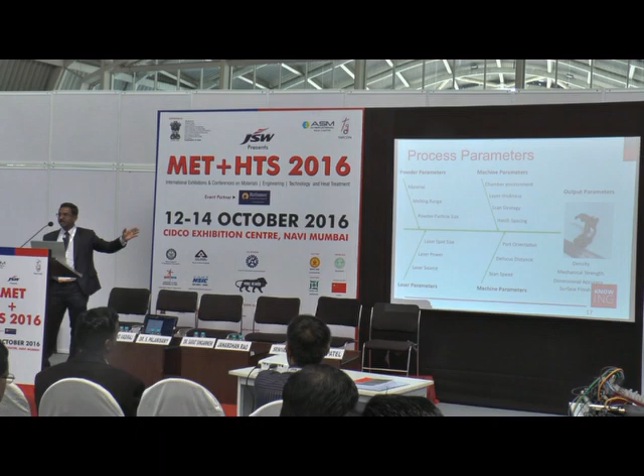As I mentioned earlier, the process parameters are key, critical things. There are a number of parameters—I've got only a few of the critical ones here: powder-based, laser-based, and machine-based parameters, with quite a number of machine parameters. To get the output, obviously you're looking at high density and mechanical strength, dimensional accuracy, and good surface finish. Those are the critical areas.

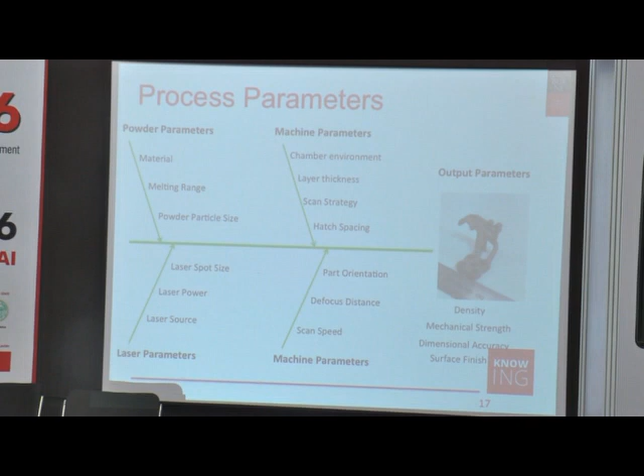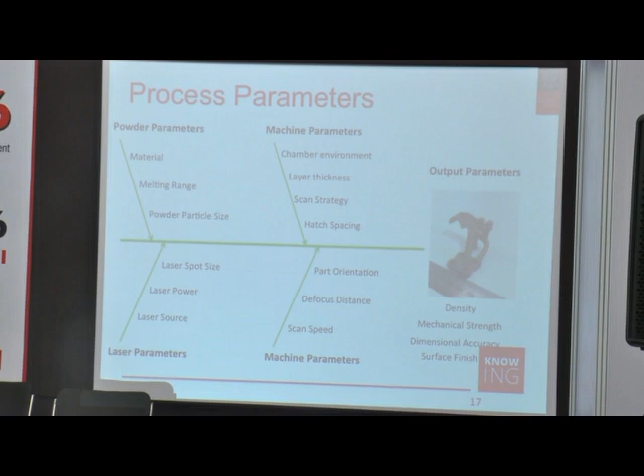The physical phenomena involved in the selective laser melting process are rapid thermal input, high solidification rate, and phase transformations. Of all the parameters, laser power and scan speed directly influence the microstructures, but in this presentation I'll focus on only a few: powder particle size, scan strategy, defocus distance, part orientation, and scan speed.

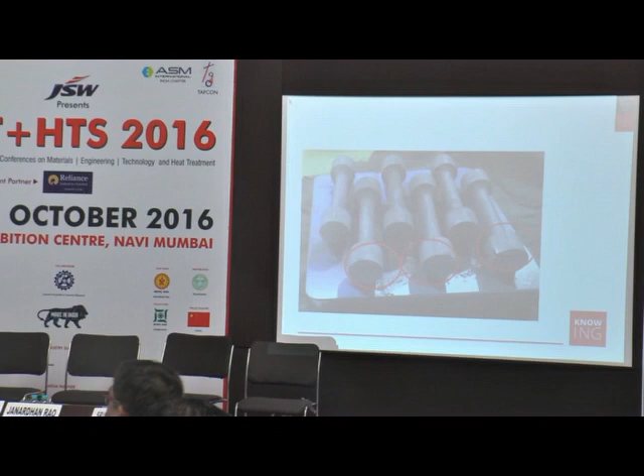Just to show you an example of what we faced when we recycled the powder - in this case, tensile samples we prepared opened up, because the powder particle size was different. You can see it there, here, and also here. The surface couldn't close properly because even though we started building it, we didn't stop - we should have stopped there but kept building the part. When the stage goes down and the powder particle size is not uniform, you get issues like this.

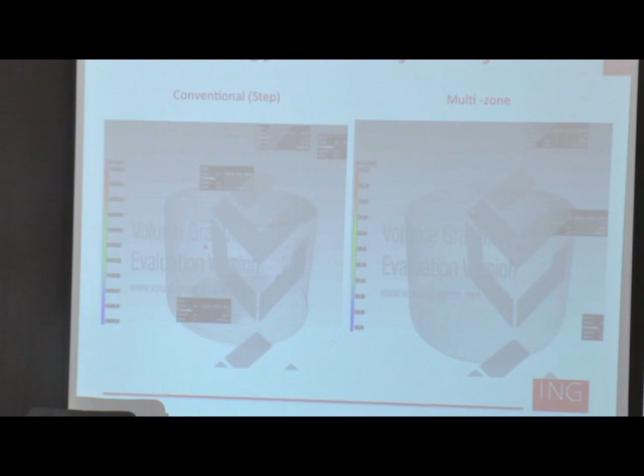Next is the scan strategy. Unfortunately, I cannot show the exact strategy we used, but I can talk about it briefly. In this case, you're looking at a CT scan image. Conventional step-by-step scan can be done, like a raster scan: go in a line, step up, another line, step up, another line.

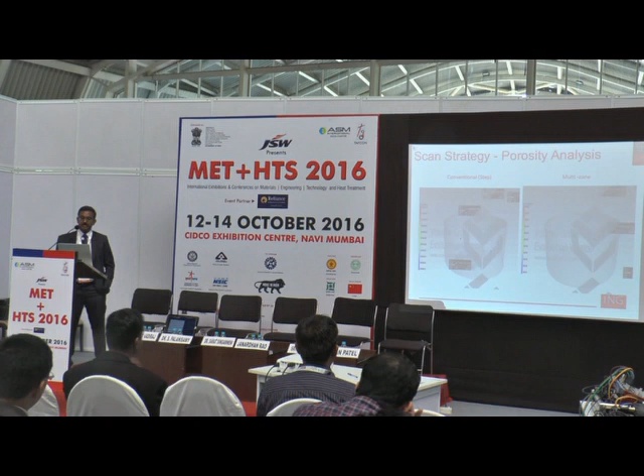Compare the conventional strategy with the multi-zone strategy which we used. There's a porosity visible in the CT scan image here. Compared to the multi-zone approach, we didn't get any porosity. So scan strategy also plays an important role.

How do you scan the laser when you melt the powder particle within a part? When you look at the top surface of the same sample in the same image, look closely here. In this particular section, the end section of the sample, you can see porosities after each scan, layer by layer.

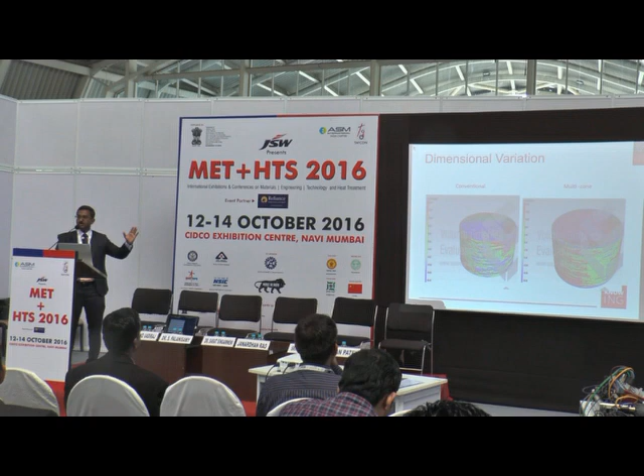It's not properly melted, the powder particle is not properly melted. When you compare to multi-zone here, the end section, you don't see any porosities in this case. So you have to optimize the scan strategy for the powder particle type and the component you want to manufacture. This is a CT scan with dimensional variation, which shows the multi-zone part looks far better than the conventional scan type.

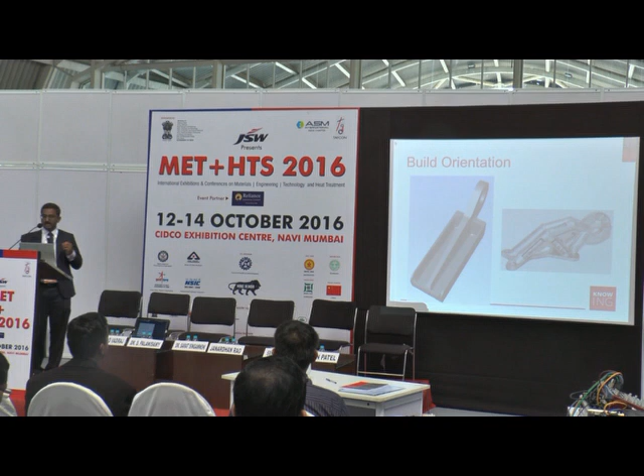However, the challenge is with regard to the inclined, horizontal, or vertical columns - what is the variation, what property variations are there? That is a bit interesting to look at from the research point of view.

Particularly in that case, quite a number of studies have been done by researchers around the world, focusing on different properties for horizontal, vertical and inclined builds. As you can see, compared to the wrought sample, which is the end data, the horizontal, vertical and 45-degree builds have completely different parameters.

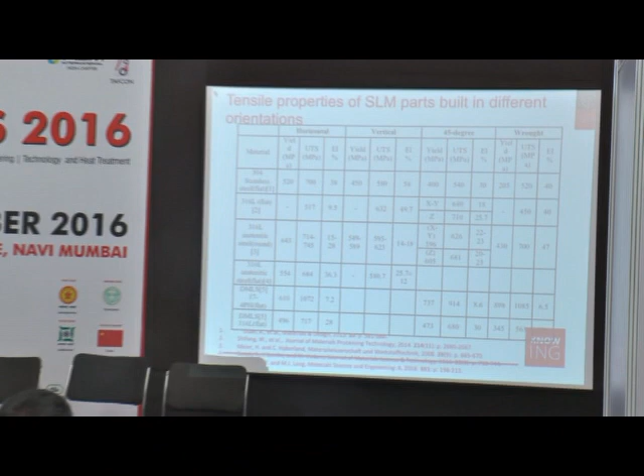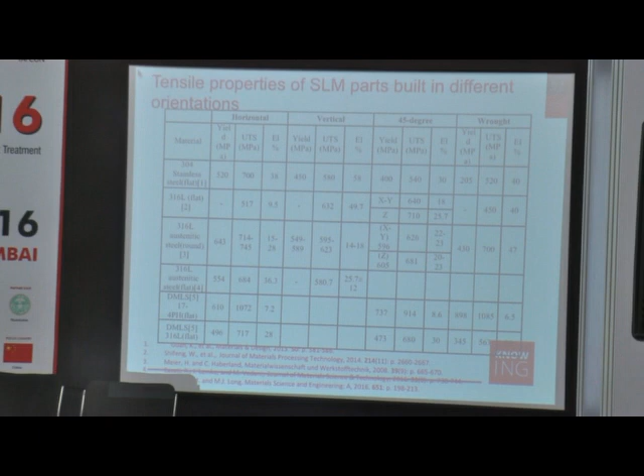Having consistently obtained this kind of information is very important to know which is the best property based on your product and what you want to use. Whether you want to build it horizontally or vertically, it all depends on the end product, where it's going to be used and applied. Again, another example from the literature.

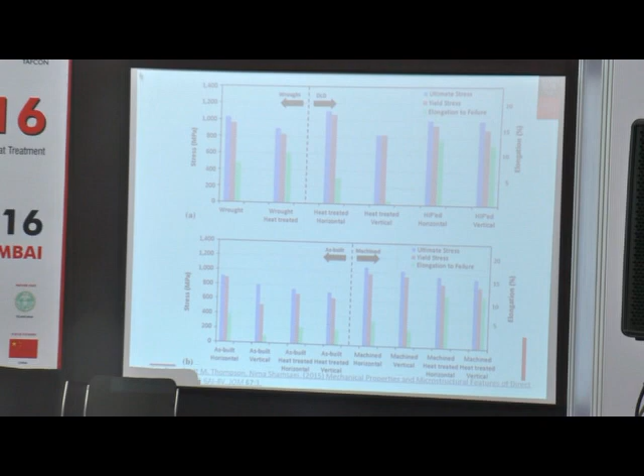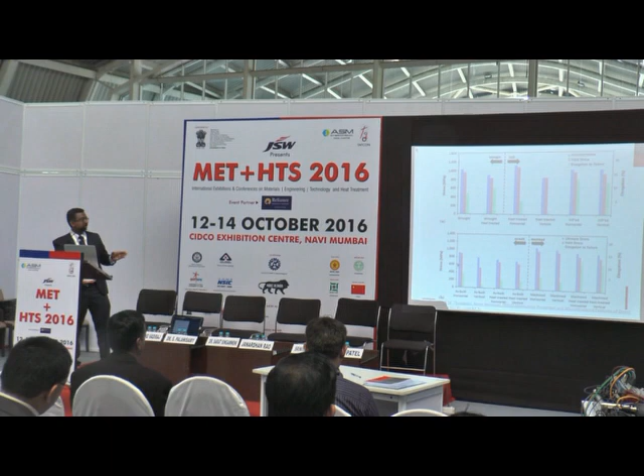You can see at the bottom graph, mainly I'm focusing on that. This is a completely different process on titanium alloys - selective laser sintering, melting process, direct metal deposition process. Again, as built horizontal and vertical, there's a significant difference in the properties compared to the machined samples, which is almost consistent. When you do vertical or horizontal, it doesn't matter, it's consistent compared to the vertical and horizontal build.

Obviously, heat treated sample has a similar condition. If you do it in similar conditions, then you gain the properties there. But as such, when you build it, there's obviously a difference in the properties.

Again, another advantage of additive manufacturing is that you can manufacture different lattice structures, different shapes and forms, so that you can reduce the weight. That's the whole idea of the additive manufacturing process.

So it's very critical to optimize those conditions to achieve a full dense part. If you don't have it, obviously the structure will fail straight away. So this is one example.

Obviously you can say, why don't you do simulation? Yes, that's a good idea. But when you start simulation, you cannot use simple wrought sample data. The properties of wrought samples cannot be used here. So you have to generate your own data through the SLM process.

That particular powder morphology, that particular powder type, whether it's vertical build, horizontal build, or inclined shape - you have to generate your own data, then use that particular data for the simulation purpose.

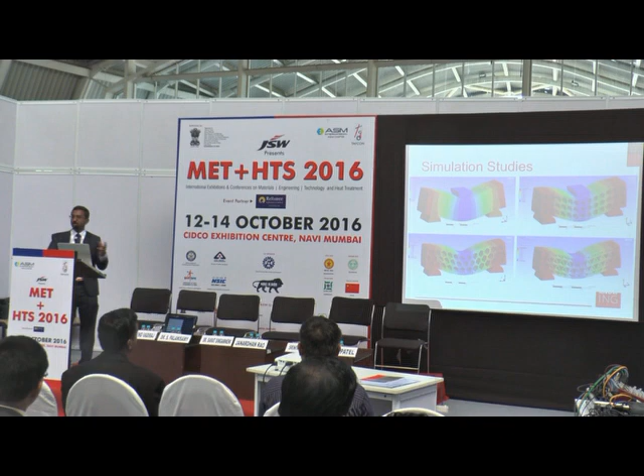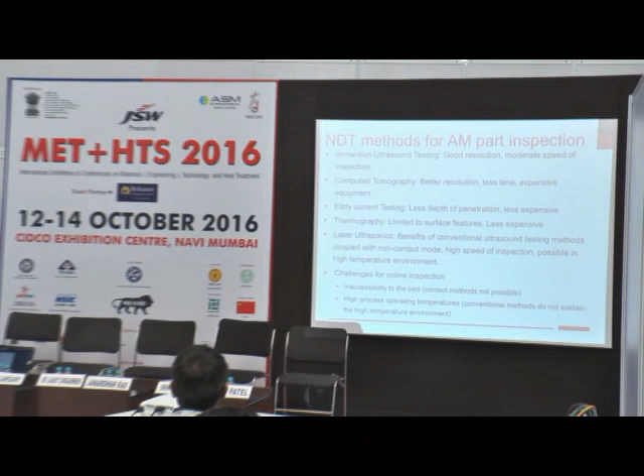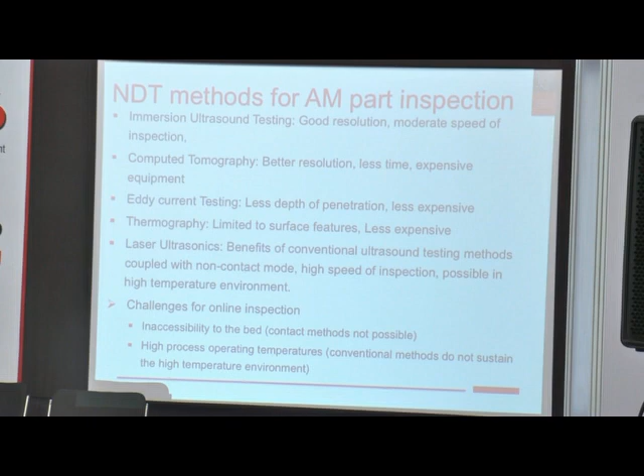So finally, the most important one is NDT. This has been mentioned earlier by Srinivas and other people, talking about the challenges in additive manufacturing processes - the NDT qualification that needs to be done at the end of the product, especially if it's going to be aerospace, defense, or structural critical components. Most of the examples shown previously were not structural critical components. So for structural critical components, it's very important to have this kind of NDT methods.

So you have a number of inspection methods: C-scan, tomography, eddy current, thermography, and laser ultrasonic testing. I'll show you in the next slide. It would be nice to have an online inspection system, but unfortunately, with the high temperature conditions in the manufacturing process, it might not be that easy. But it would be nice to have something like an online inspection system.

So in this slide, I made some comparison between different inspection processes - what would be a likely scenario where you can use each one?

Most of the time now, tomography is being used because you get a lot more information, which is very helpful. Obviously, cost-wise it's high, but speed of inspection is comparatively high, resolution is high, and the depth of information is high.

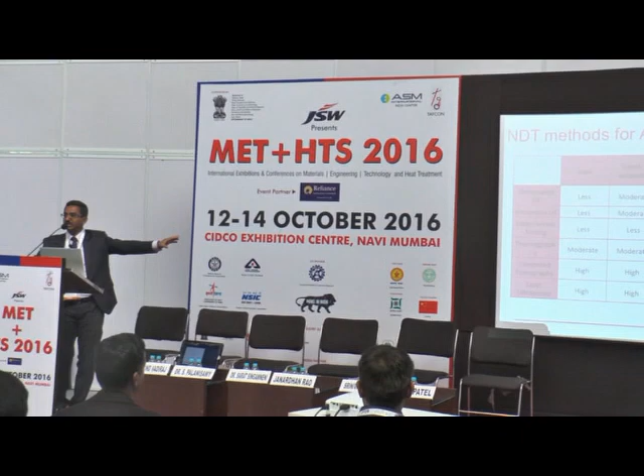Unfortunately, it cannot be used in high temperature conditions. However, with laser ultrasonics, you get a lot of information, and the cost compared to tomography is cheaper. For example, if a tomography machine costs $1 million, a laser ultrasonic machine will cost around $200,000 - so it's 1/5 of the cost.

The only problem is you may not get the same information as tomography, but it can be applicable in high temperature applications. So when the part comes out with high temperature, especially in direct metal deposition, it can be used in that particular case.

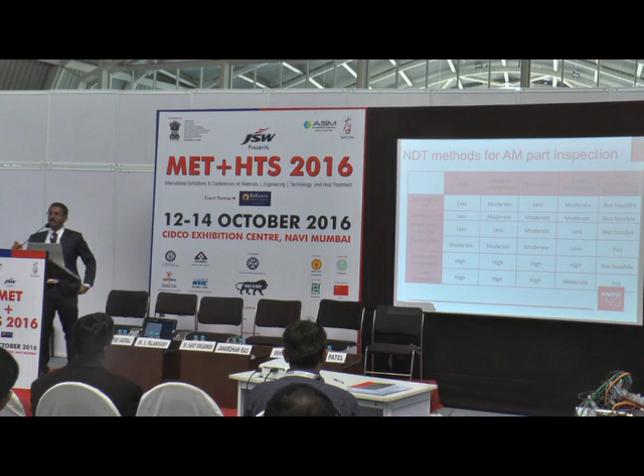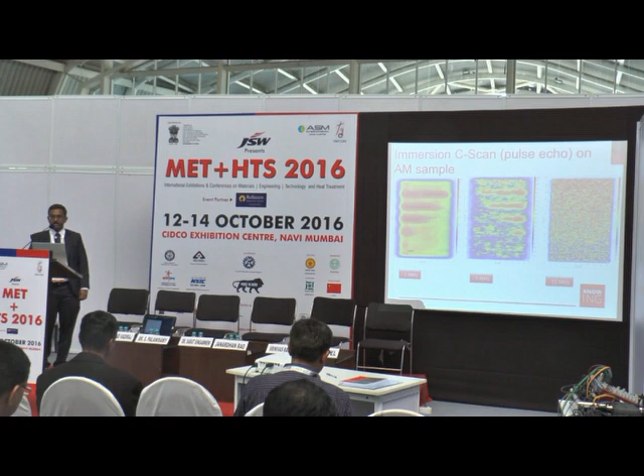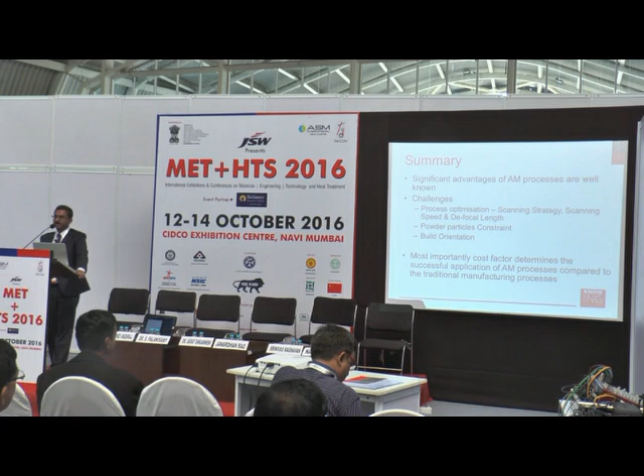So finally, to summarize, obviously there are significant advantages for the additive manufacturing process - there's no question about that. But the challenges, as I mentioned, are key things: process optimization, especially looking at scanning speed, scanning strategy, and also looking at the defocal length or critical parameters, and also powder particle size.

Still, as manufacturers and suppliers of powders say, obviously you can use it for a number of times, but there are certain limitations there. So you have to find your own constraints within the powder recycling process. You have to identify how long you can use the powder depending on the parameters you are using - that's the other challenge you have to identify yourself.

And obviously, the build orientation is the other factor which has to be looked at, because depending on the part, what you're looking at and where it's going to be applied, that will determine the build orientation and the properties you want. And obviously the cost has been mentioned by all the presenters, which is a critical parameter also when you decide what to do with conventional or additive manufacturing.

But again, additive manufacturing has its own advantages. The parts that can be specifically manufactured by additive manufacturing have a significant advantage over other conventional processes - that's where additive manufacturing is really useful. But if you can address these challenges, then surely significant progress can be done.

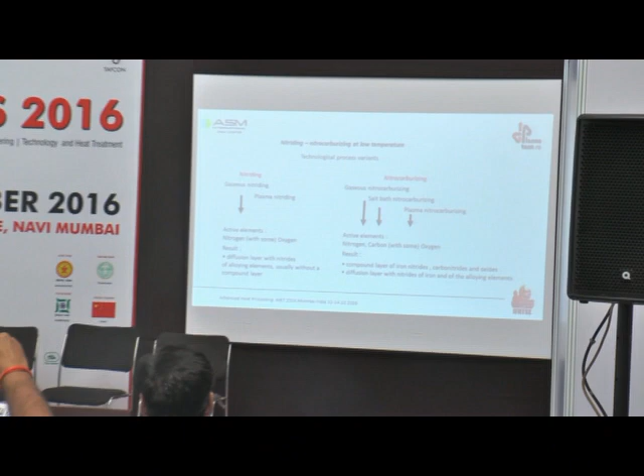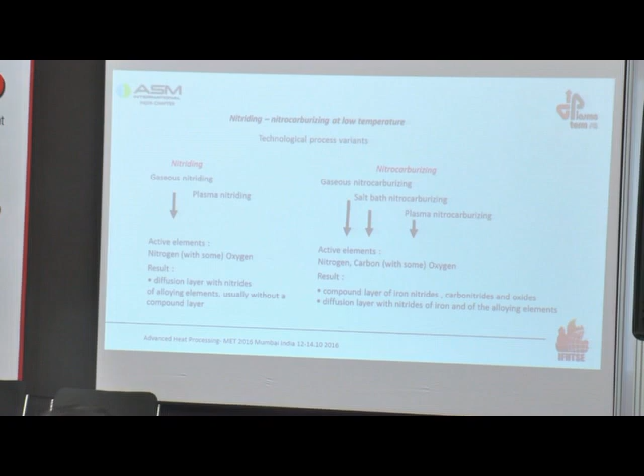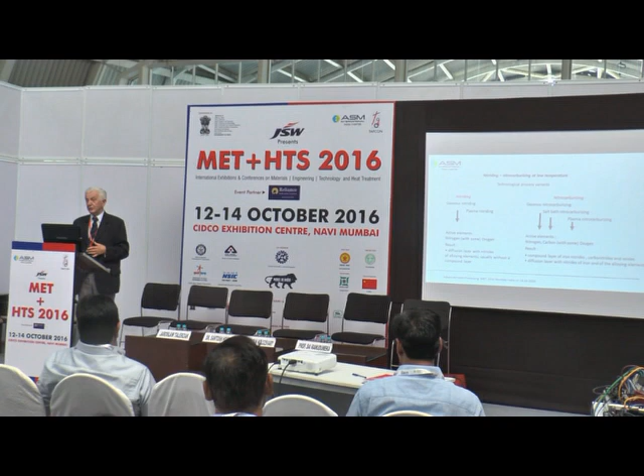So this is very important, because many times in industrial applications there is this kind of confusion. That's why I made this small presentation: nitriding is gases or plasma, and nitrocarburizing is gases, salt baths, or plasma. I must tell you that I am very much a fan of salt bath nitriding, but unfortunately, due to environmental regulations, we had to replace salt bath nitrocarburizing with other procedures, gases or plasma, which certainly work and are very good, but still in many application areas salt bath has a big advantage, though we have to forget about it for the moment.

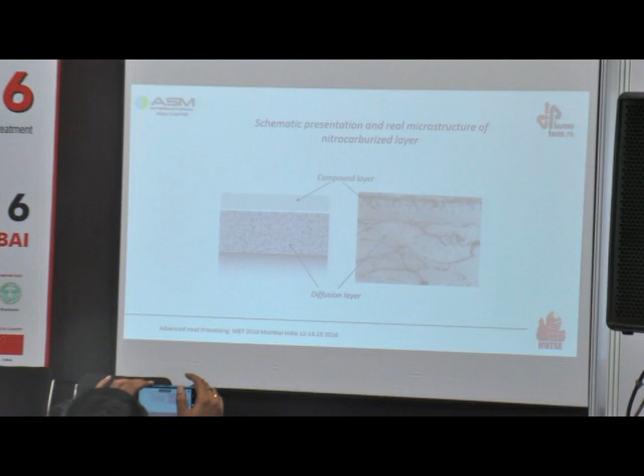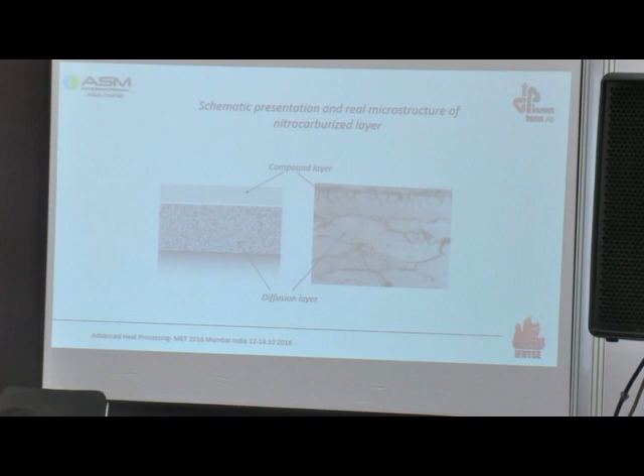And when you talk about nitrocarburizing, I have also shown the compound layer, which I should like to emphasize one thing about. There are many discussions about what should be the ideal porosity of the compound layer—should it be porous or not? Well, in my experience, a certain porosity for different application areas is extremely important.

For instance, once again back to the textile machines—that's very important because in many cases you have a boundary lubrication, which means no hydrodynamic lubrication is possible, and in this case the porosity of the compound layer plays an important role because it will enhance the wear resistance.

It's also—we have now a very interesting application. We are working in a consortium for an EU project managed by Imperial College in London, where my task was to solve the problem of the wear of a tool. It's alloyed cast iron. Well, we now obtained a very good nitrocarburized layer, a good compound layer with controlled porosity.

And what we are doing now, and maybe somebody can help me in this respect, is to introduce nanographite into the pores, because then there is lubrication—this is for deformation of aluminum, and aluminum does not accept any kind of liquid lubricant for deformation. But I think, and this theoretically should be correct, that introducing nanographite into the pores of the compound layer is a possibility to obtain good wear resistance.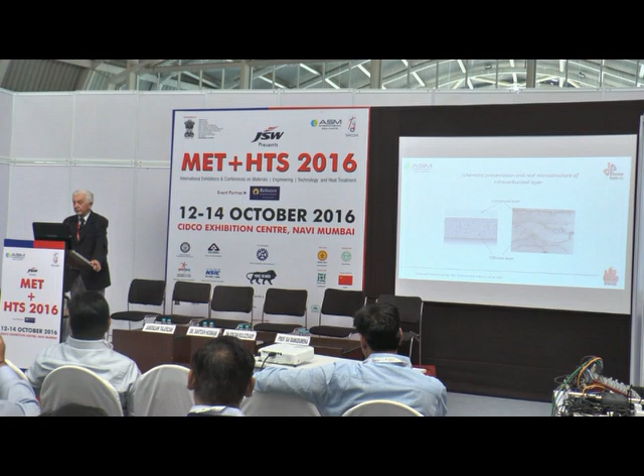We see. Well, there are just a couple of examples of different steels, nitrocarburized, because we probably do about 70–80% of our treatments as nitrocarburizing, and then the rest is nitriding.

Well, certainly this is also well known, that in this respect we have to be very clear that the diffusion layer does not change the structure in the diffusion layer. It's a strengthening through precipitation, the precipitation of the carbides of the alloying elements. But in the compound layer, the alloying elements practically don't play any role, or their role is not significant. So this is very important.

The last notice for stainless steels: we make a lot of plasma nitriding for austenitic stainless steels at low temperature, which means a temperature below 400 degrees centigrade, obtaining a supersaturated austenite, the so-called S phase, with very good results. And I think this is also one of the very important treatments.

Well, we tried all the possible versions of nitriding and nitrocarburizing.

We started with gaseous nitriding when it seems that we were the first to observe the role of oxygen in the nitriding as an activating medium. Then we made salt baths, and we are working now mostly on plasma. We built the equipment, it was built by our company, and I hope now it will be introduced in India by our partners here.

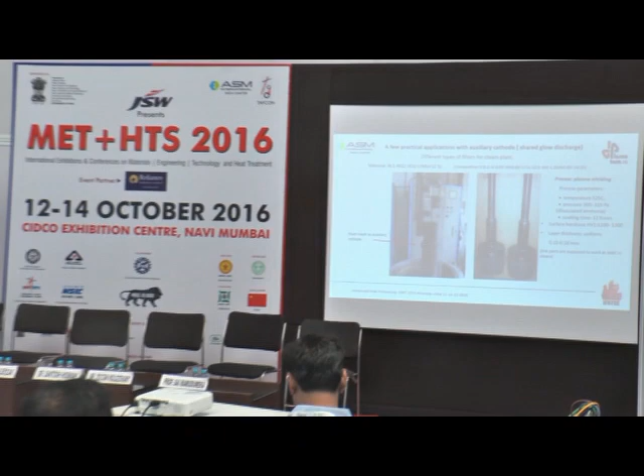What I should emphasize, because of time, is a couple of applications which gave very good results. We got from a company from Canada some filter rods for a steam plant, where you have to have both the shaft, the mantle, and some 500 holes of about 8 millimeter diameter in the mantle nitrided with a uniform layer. I don't think anybody can do it without an active screen or without a secondary cathode. We use a secondary cathode, so the shared glow discharge, and we obtained very good results.

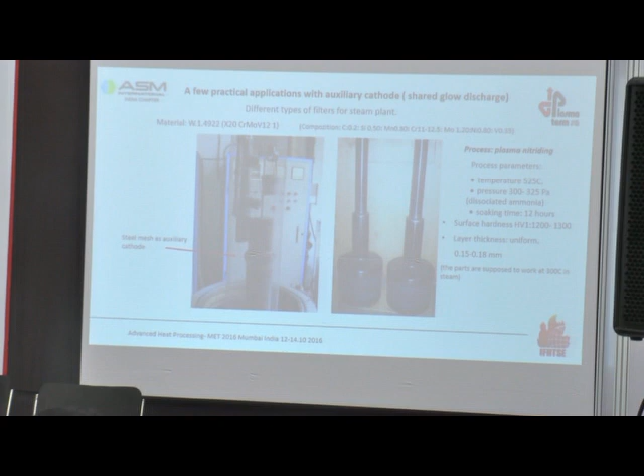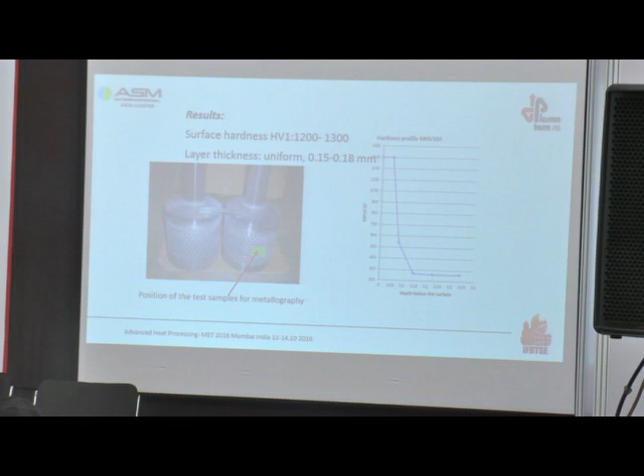As you can see here, this is the micro hardness plot with a very high micro hardness. You have the steel there and everything. If you compare the structure, the left side is in the holes, and the right side is on the mantle. So you see that the layer is very uniform in both the mantle and the holes.

We have some 12 different parts like this, but let me show you a rather unconventional load, because there are a lot of different small parts, even of different steels, in one single load with auxiliary cathode, so with shared glow discharge, and we obtained really very stable results, and that's not once. We are producing it continuously, so it's a flexible contract heat treatment, I might say, and we obtained very good results.

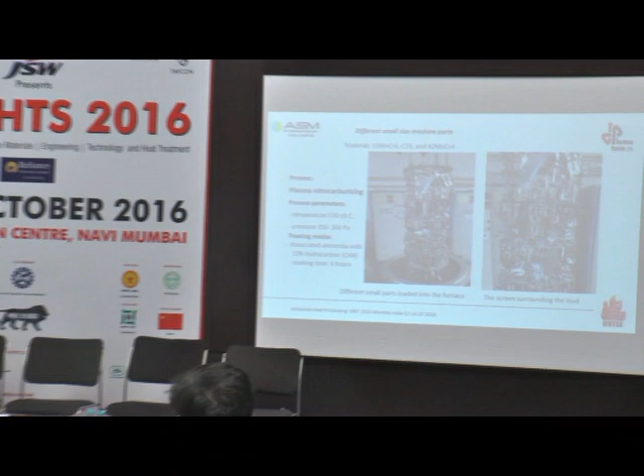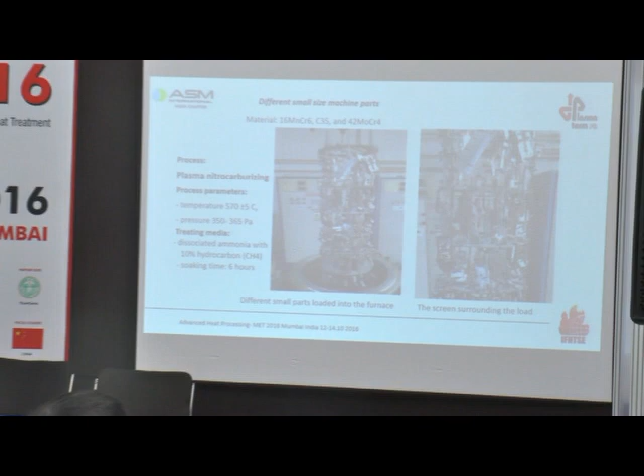These are two steels, one is C35 steel with a compound layer, the other is a chromium molybdenum steel, which is well known for you. So what is important in such a very specific load? We did not have problems with the edge effect. This is what we still have to elucidate, we still have to work, and we are working with some colleagues from Freiberg and even Birmingham, just to try to explain why there is this advantage in this case of potential.

In conclusion, certainly nitriding, nitrocarburizing — I forgot to tell you that it was not nitriding but nitrocarburizing for all these parts, but it was written. So nitriding, nitrocarburizing may be performed with good results in very different treating media and for very different parts. Till now we have a kind of record with more than 500 different types of parts with very good results from what we apply.

And another thing: an auxiliary cathode, as we named the shared glow discharge, could work very well in conventional DC plasma nitriding units. Certainly it's recommended only for low power, because the energy need increases by about 20 to 25%. Thank you for your attention.

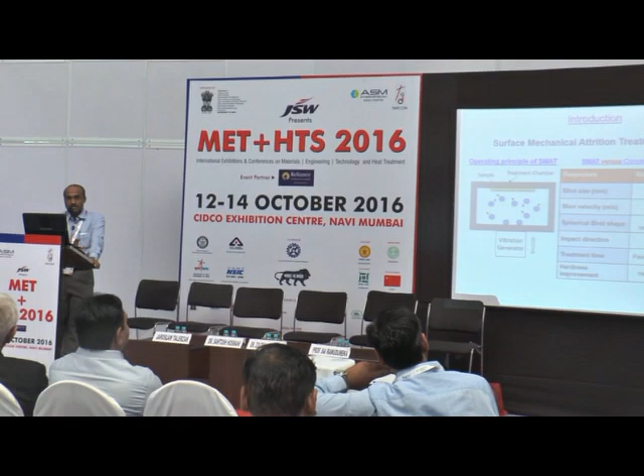You may think this process is similar to shot peening, but fundamentally it is different. In shot peening, you have different shot sizes, your shots can be irregular in size, and the velocity of the shot can also be different. So in short, the shot peening process and SMAT are fundamentally different from each other.

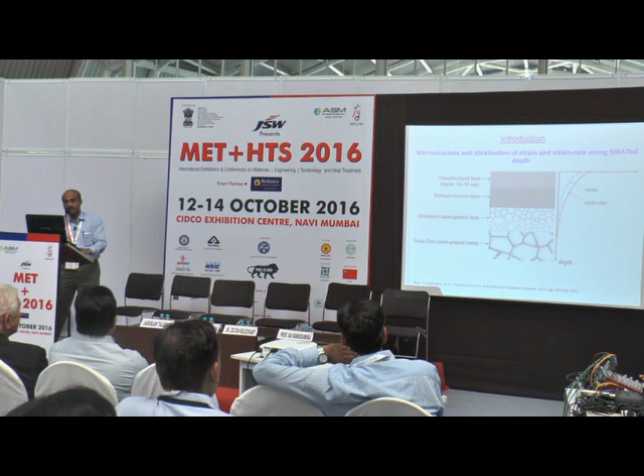So what is happening in the case of SMAT? You have accumulation of strain at the specimen surface, and that strain gradually decreases as you move inside the specimen. This means continuous deformation, and due to this deformation you get formation of nanograins at the specimen surface. These nanograins or crystallites help us in various different ways. What I'm going to focus on is how this nanograin formation affects the nitriding behavior.

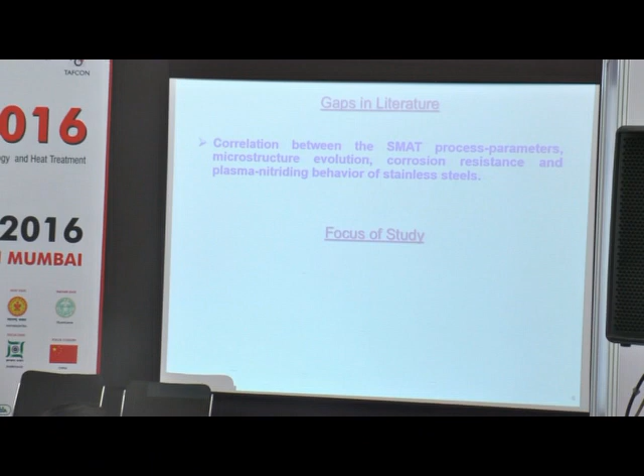Before that, I need to explain a bit about the SMAT process and how SMAT-ing of stainless steel plays a role. We started working on this topic four years back, and what we observed is that the literature does not specifically mention the role of SMAT parameters, and the effect of those parameters on corrosion resistance, that is, passivation behavior of stainless steel, and how that passivation behavior interferes with the nitriding process. That's why we selected this topic.

Due to time constraints, I'm not going to speak about all three topics, but I'll focus on the first two. In the SMAT setup, you have a vibrating bottom plate, and spheres, hardened balls, continuously hitting the specimen surface. That vibration can be given by mechanical means or electromagnetic vibration. We fabricated this setup in our laboratory and gave electromagnetic vibration to the bottom plate.

Here it's important to know the velocity of the ball, which is very much dependent on the ball size. Depending on the size of the ball, you have different kinetic energy stored in the specimen. At the same time, this velocity decides how many times the specimen surface gets impacted by the vibrating ball. So in short, if you really want to understand SMAT parameters, there are multiple factors, and these factors together should give some conclusive understanding that helps explain microstructure evolution in the material.

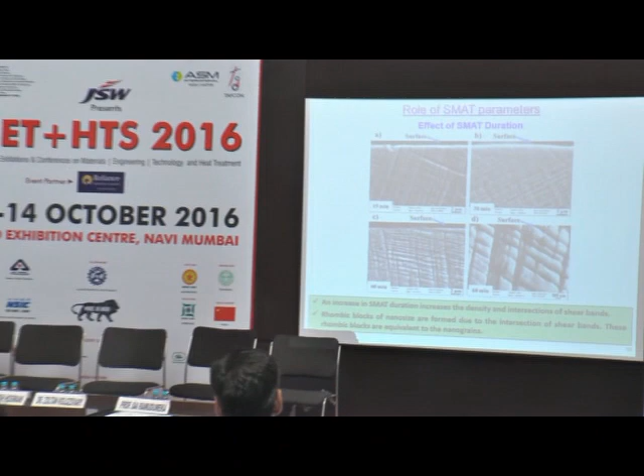I won't be able to speak about all those parameters, but briefly what I want to say is that this microstructure is not a badly prepared or metallographically prepared sample. It is not scratches. These are all mechanical twins or deformation twins, generated due to continuous impact by the balls.

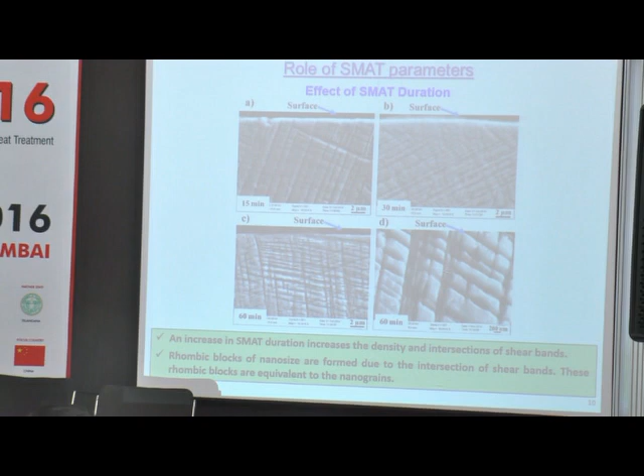If you see these mechanical twins, they interact with each other, intersect with each other, and get converted to rhombic blocks. They are nanometer in size. These rhombic blocks play an important role in the oxidation behavior of the material, that is the passivation ability and nitriding process.

At the same time, since it is an austenitic stainless steel, you know there is a deformation induced transformation, called deformation induced martensitic transformation. Here, since the process is plastic deformation, there is formation of martensite at the specimen surface.

This martensite quantity is very much dependent on the SMAT parameter. As you increase the SMAT duration, the percentage of martensite will increase. Because of the continuous deformation happening, this deformation induced martensite depends on strain rate and amount of strain. As you increase the SMAT duration, the amount of strain at the specimen surface keeps increasing. So the percentage of martensite will keep increasing with respect to time.

Apart from that, for a constant SMAT duration, the martensite can still increase if you have more number of balls in the SMAT chamber, because for a given time, the entire surface is impacted by more balls. That means you have the pinning intensity. This is a new term we introduced, which is quite effective in qualitatively explaining the amount of strain at the specimen surface. I won't go into the theoretical aspect of this.

Here you can see two sets of microstructures shown. One is with the 3 mm diameter ball, another is the 8 mm diameter ball, and the percentage of balls changes from 25% to 50% to 75%. As I move from one end to the other, the number of balls increases. At the same time, for the same percentage of balls, if I change the diameter from larger to smaller, the number of balls again changes, even though the percentage of area is at 25%.

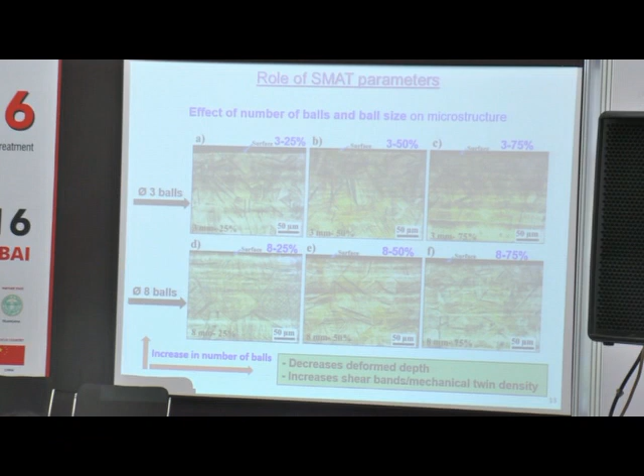That means the surface is attacked more by the etchant, meaning I have more mechanical twins in the specimen surface. At the same time, the spacing between mechanical twins also decreases. This means the amount of deformation at the specimen surface increases as the number of balls increases, and that plays a role in the amount of martensite quantity in the specimen surface.

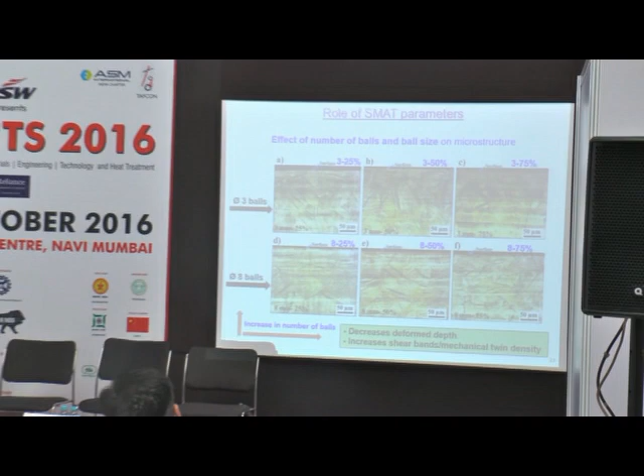Now how do you explain this? There are plenty of things to consider - the impact changes if I change the gap between the specimen surface and the bottom plate, the number of balls is another constraint, SMAT duration is another constraint. So I have plenty of variables. How can I explain all those variables in a single term? That is by using pinning intensity. This is a major contribution by us to this particular phenomenon.

Pinning intensity will tell you the correlation. We got a perfect correlation between pinning intensity and quantity of martensite. As I increase the percentage of ball, my pinning intensity also increases, shown by the blue color line. So pinning intensity increases, and at the same time, quantity of martensite also increases. Martensite quantity is very much dependent on amount of strain, so as I increase the ball and increase the PI, strain is increased, that's why martensite quantity increases.

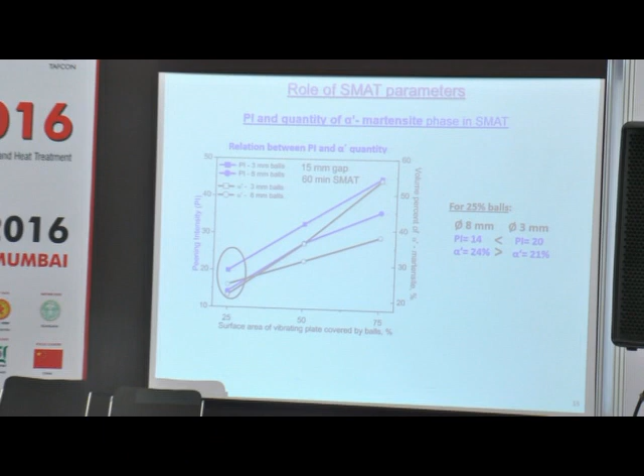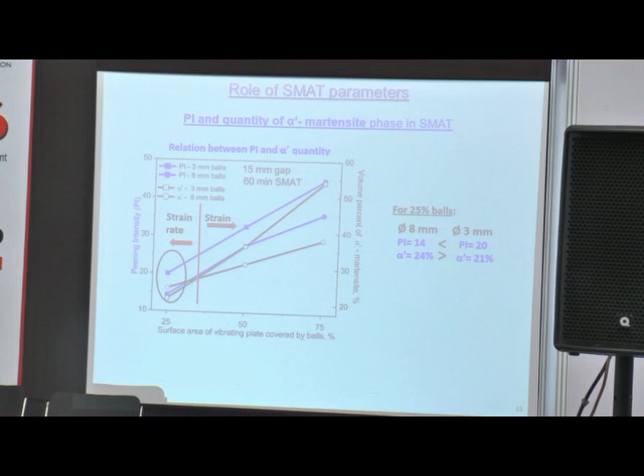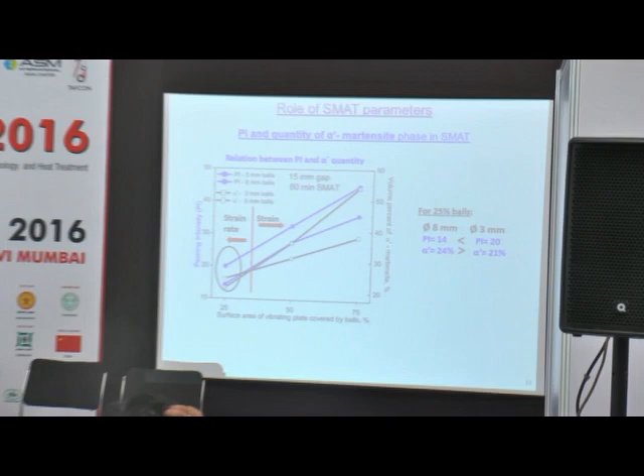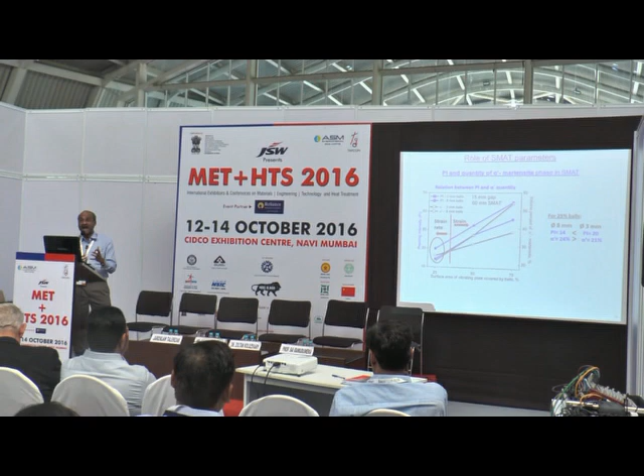However, at the lower percentage of ball, you see the reverse trend. Even though my pinning intensity is more for the case of 3 mm diameter ball, still the martensite quantity is lower. Why is that so? Because there is another term that comes into the picture, that is the strain rate. You have the higher strain rate when only a small quantity of the space in the chamber is occupied by the ball, so you have very large velocity and less collision between the balls. So you have the high strain rate, and higher the strain rate, you have adiabatic heating, and because of that adiabatic heating, you have the lower percentage of martensite quantity.

Anyway, these are all related to the martensite quantity. Now our session is related to the nitriding, so I'm more interested to talk about nitriding now. These are just the conclusions for this part 1.

Now what we observed is that due to different SMAT parameters, the corrosion or passivation behavior of the specimen is different. When we do the nitriding, you know there are two processes: one is the sputter cleaning, which cleans the surface of any contamination as well as oxide, and second is the plasma nitriding process. What is the duration for sputter cleaning? What is the duration of nitriding time? People rarely mention for what duration the sputter clean process should be done. That means if you do less sputter cleaning, and if your material has more passivation tendency due to this plastic deformation, then in your nitriding process your actual nitriding time is reduced, because some duration is consumed to do the sputter clean, which wouldn't have been needed in the earlier step.

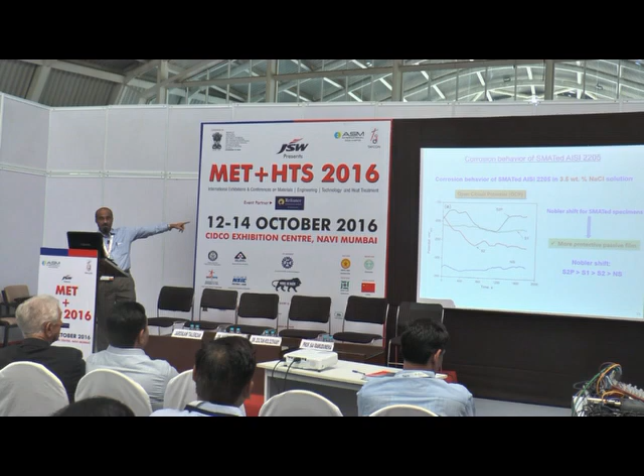So first I will show you the corrosion results. What we observed is that the bottom line is for the non-smatted specimen. As you do the smatting, the open circuit potential value increases, shifted upward. That means your corrosion behavior is now improved, your corrosion property is improved.

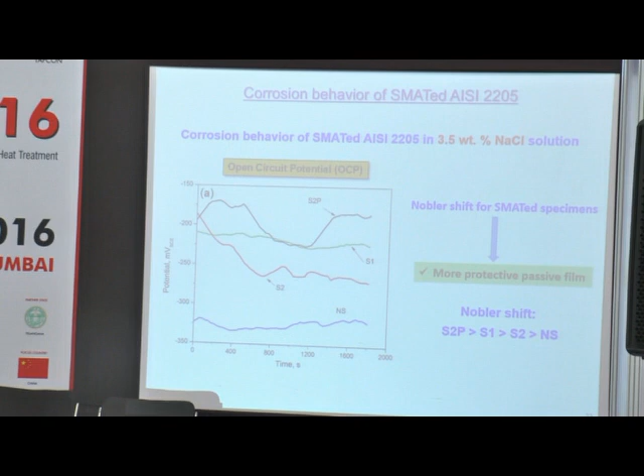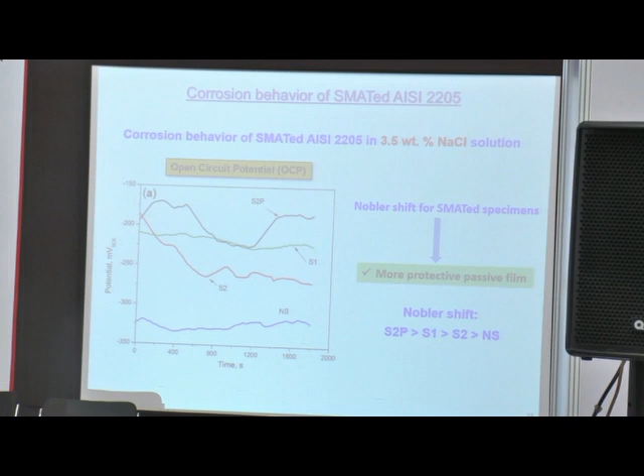Again, in the SMAT process, the surface becomes rough, that roughness is about 0.5 micron to 1 micron. You remove that surface roughness and observe the open circuit potential, and it shows that your corrosion property is further enhanced. That is your S2P, meaning the polished sample, P indicates polished. So the polished sample has a better corrosion property.

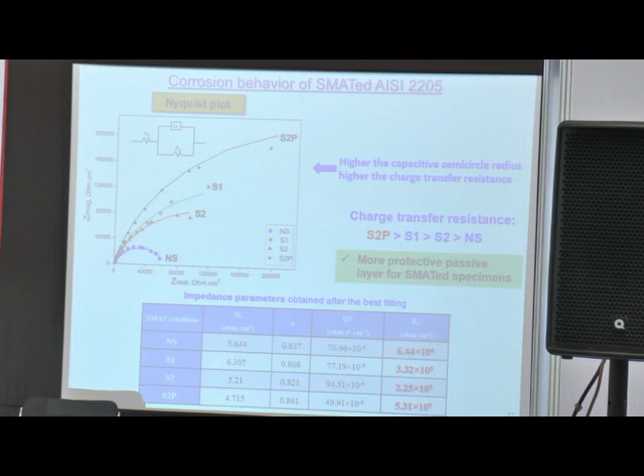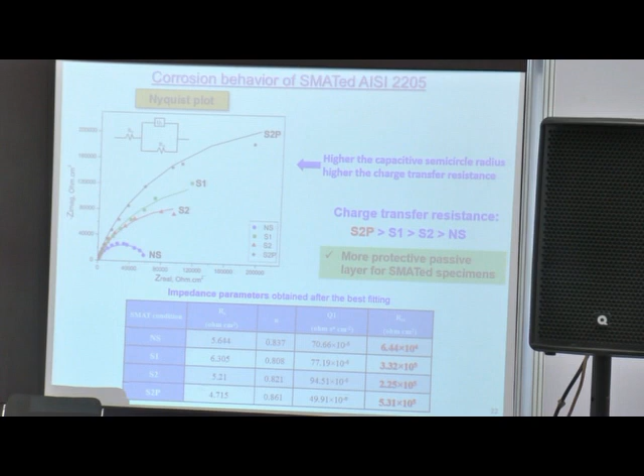There is another proof for that, from the Nyquist plot: the larger the radius of this particular plot, the better the corrosion property. So what we observe is that the S2P sample, where S2 indicates the smatting condition and NS indicates the non-smatting condition, shows that the non-smatted specimen has the lowest corrosion behavior, while the S2P has a better or superior corrosion behavior. That means the passive film is quite stable there.

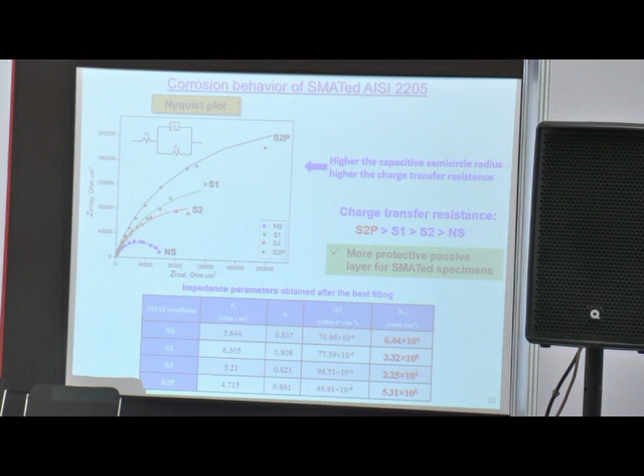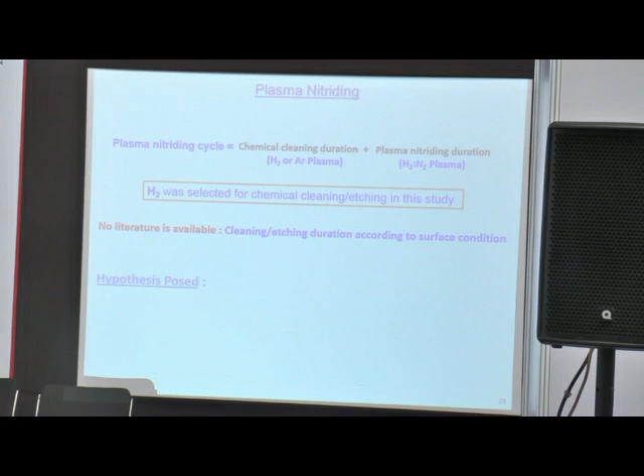Yeah, I'll just wind this up. As I mentioned, plasma nitriding consists of 2 steps: one is the chemical cleaning duration and the other is the plasma nitriding duration. That chemical cleaning can be done using hydrogen or argon atmosphere; we did hydrogen atmosphere. Now, our hypothesis is that if my passivation behavior is increased due to surface deformation, and if I'm not choosing the appropriate sputter clean duration, then my nitriding duration is consumed there. In short, my effective nitriding time is reduced. That is my hypothesis, which I have to prove.

How do I prove that? Intentionally we selected 2 sets of experiments: in one we selected a lower sputter clean duration, in the other a higher sputter clean duration, that is 30 minutes and 120 minutes. What is the effect of that? This set of experiment is N1, the lower sputter clean duration, and the other is the higher sputter clean duration.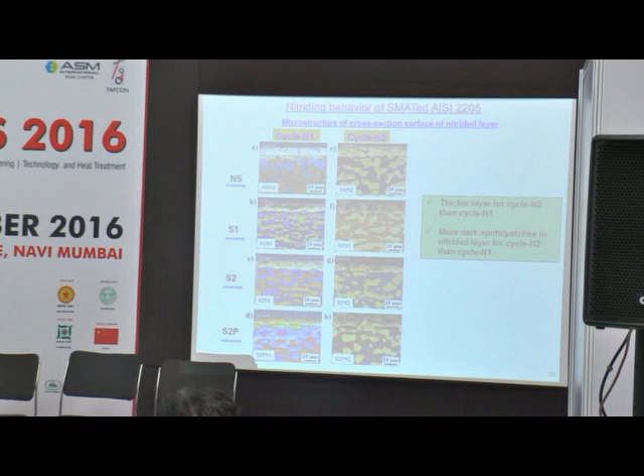In all cases, you got higher case depth compared to lower sputter time. Even though the plasma nitriding duration was entirely the same, only sputter cleaning duration was different, and that drastically affected my nitrided layer thickness. There is another proof for that - the GDOES gives the nitrogen concentration depth profile.

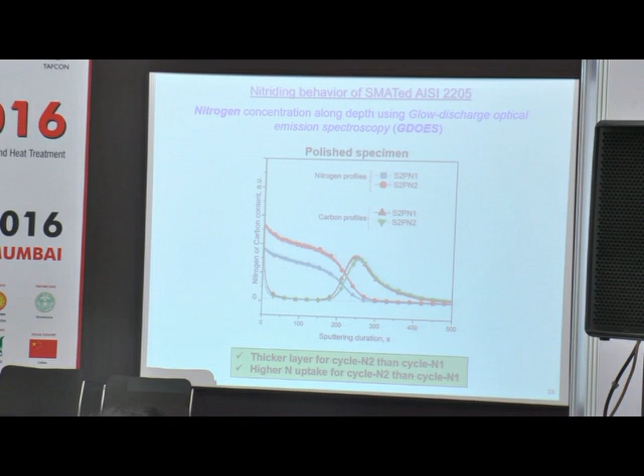You can see that the red one corresponds to the N2 cycle, which has a higher sputter clean duration. So the higher the sputter clean duration, the deeper the case depth I got. That also means you get a higher surface nitrogen content. So all these results confirm that.

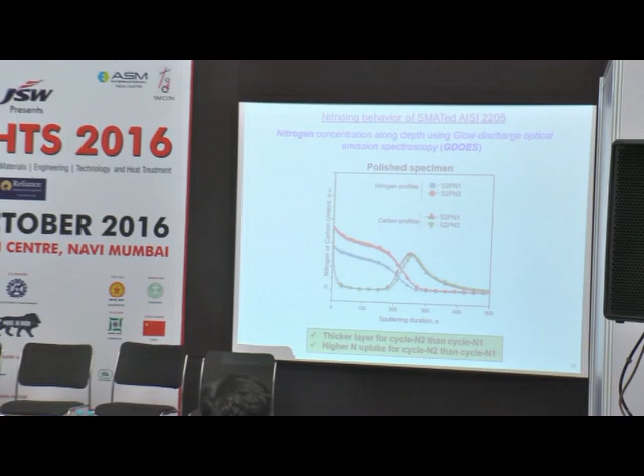We have the influence of sputter duration on the plasma nitriding duration. And why is it affected? Because of surface deformation. So whenever your surface is subjected to any kind of grinding or machining operation, you should carefully select your plasma nitriding parameters, because that significantly affects your case depth. That is what I want to explain here.

Another thing is that in this case you get expanded austenite, as mentioned by my previous speaker. In the case of stainless steel, you get an expanded austenite, and this expanded austenite decomposes into stable phases - chromium nitride formation or ferrite formation at later duration.

There is another indication of that in the case of XRD. In the N2 sample, we got the X-ray diffraction peak due to chromium nitride formation. That further confirms that we had a higher plasma nitriding duration. So in short, we have well confirmed this behavior, and then we propose the mechanism.

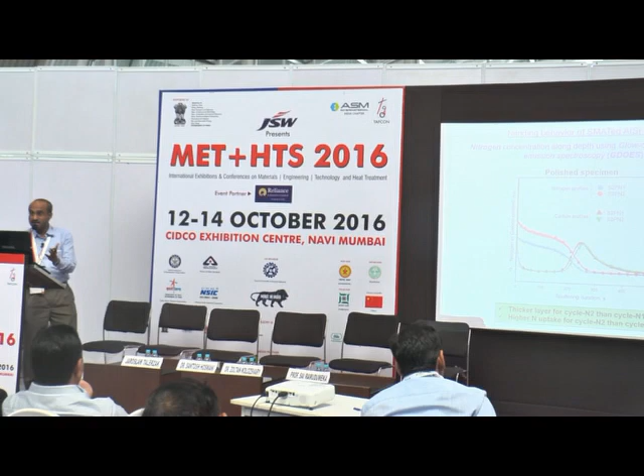Due to the time lag, I can't discuss the other interesting aspect, but I'll just show it. Here you can see this peak, which is due to carbon. Our process is nitriding, but still carbon is picked up into the nitrided layer, in front of the nitrided layer. However, within the nitrided layer itself, we don't have any carbon content.

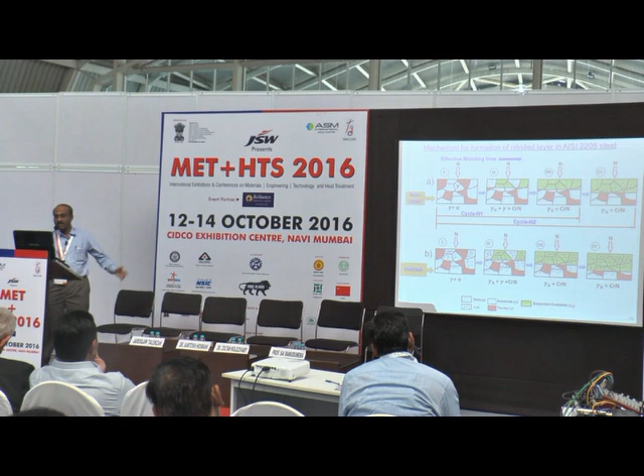We have almost zero carbon content, but carbon accumulates in front of the growing interface of the nitrided layer. There is some mechanism for this, but I will not discuss it due to time constraints. However, if you're really interested, I'll just show you this behavior.

What happens is that during sputter clean duration, you get carbon accumulation at the specimen surface. That can come from your furnace wall. You have high temperature during sputter clean, and that high temperature with adsorbed carbon and oxygen in your passive film forms CO gas, which is in direct contact with the specimen surface.

That means you have high temperature as well as carbonizing potential, which is enough to absorb carbon at the specimen surface. Over a period of time, this carbon is simply pushed forward as the nitrided layer grows. So that is the mechanism we have.

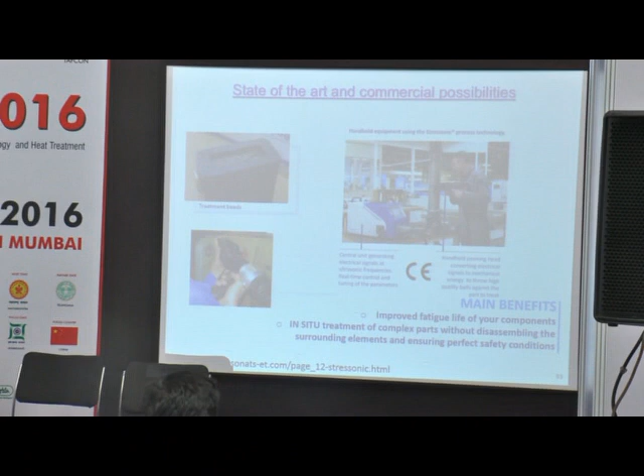So that's it. This process is not only for the laboratory level - people are using this surface mechanical attrition treatment for commercial products as well. Just an example shown here in this slide.